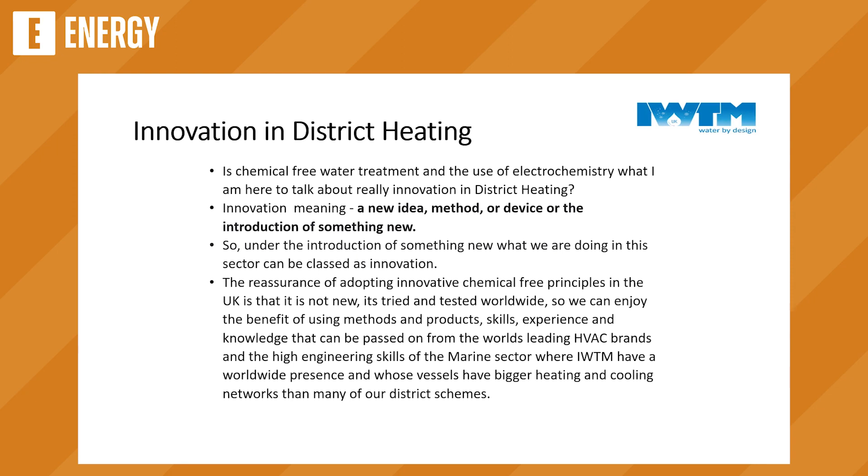We've only been in the UK for 3 years, but we can lean on the experience of all our European partners from the Nordic sector, Scandinavia, the marine sector, and the world's leading HVAC brands who have our technology within their warranty documents because they don't want chemicals within their products. That's the recognition of what we do.

We talk a lot in the UK about following the Danish guides for our district heating systems, and over the last few years we've adopted their principles for low temperatures, wide deltas, pump control, metering and efficiencies. But the one thing we've skipped over is what they say about avoiding the use of chemicals. The Danish network guide says we should avoid chemicals, because if you have a district heating system which leaks into the ground, you're putting chemicals straight into the water table.

The Nordic Innovation Centre report in 2004 - that long ago we had 500 systems in operation using our products in Norway in district heating networks.

VDI 2035 is a German standard, and that is all about chemical-free water treatment, and you'll see that mentioned in a lot of the big brands' manufacturers' warranty requirements. So world-leading brands have got it in there - you should follow VDI for your warranty purposes. And in the Swiss and Austrian norms, it's all about chemical-free.

We've had the efficiency of our products tested by the most respected Dr. Philip Mung from Midland Corrosion, because the obstacles we were getting when we first started in the UK were people saying, well, it's okay on European water, but our water's different. So just to prove the doubters wrong, we had it tested in UK laboratories.

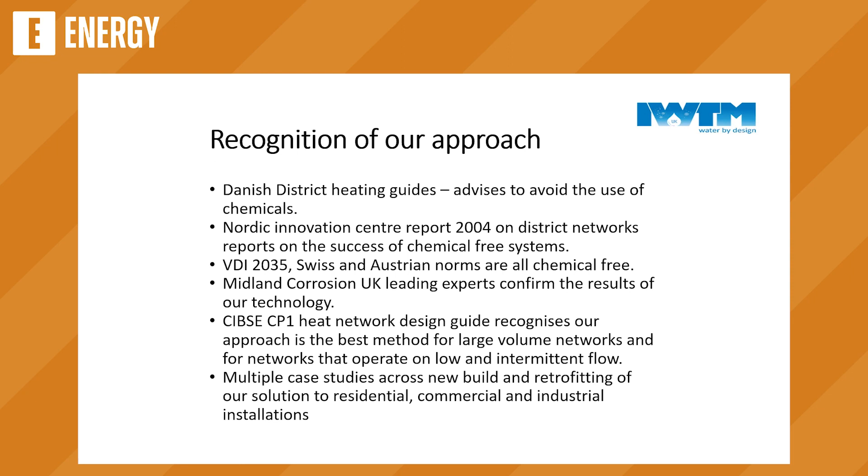We've got multiple case studies in new build and retrofit environments, but more and more now it's clients doing environmentally friendly projects who want to start avoiding chemicals. So the major networks we've been involved in include Bunhill - the world's first project to take heat off the London Underground and heat up homes in Islington, schools and a leisure centre. It's a renewable energy project, with a heat pump sitting on top of a disused underground station, taking heat from 30-35 degrees up to 70 for district heating. It made no sense to have a renewable project but then fill it full of chemicals.

Barking Riverside is a scheme in London which is going to be 16,000 homes. It started its life as a chemical system, but for complications of phasing they've now moved to chemical-free, which makes the phasing a lot easier when you're not using chemicals. There's also Stoke City Network and Swaffham Prior, a project we're really pleased about which I'll talk about more, and the Viking Network - hundreds of smaller district networks we're on.

Then there are developers who are concerned about the environment and are moving to heat pump technology. It makes no sense on one hand to say I'm putting in an environmentally friendly system using heat pumps, but then fill it full of harmful chemicals. So if you've got renewable technology, look at other things too to reduce carbon emissions.

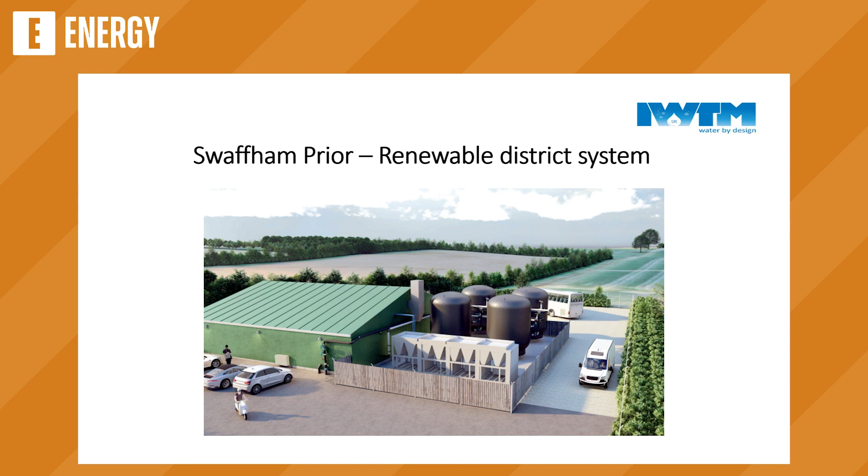Swaffham Prior was the UK's first project to be 100% renewable energy. It uses ground source heat pumps, air source heat pumps, and a solar PV field to generate electricity for the energy centre. It's our largest district network to date - 450,000 litres of water, all done without using 1 litre of chemicals. If that was a chemical system, it would have needed 9,000 litres of chemicals to treat it for commissioning, cleaning and biocides, which equates to 450 20-litre drums, to give you an idea of how much that would be.

And of that, 50% would have gone down the drain because you'd have used it for your cleaning, your process, dumped it, and then refilled again. So we have done it without using 1 litre of chemicals.

The client and the pre-commissioning contractor were new to our technology, so a bit sceptical about whether it would work. But working together with them, we came up with a pre-commissioning plan to make sure they got through the process painlessly.

So the energy centre was cleaned by filtration, and the district network by ice pigging. I don't know if anyone knows about ice pigging, but it's a bit like a slush puppy, which is pushed through the pipe. As it pushes through, it cleans the debris, and the ice just pushes the debris out to the other end of the network.

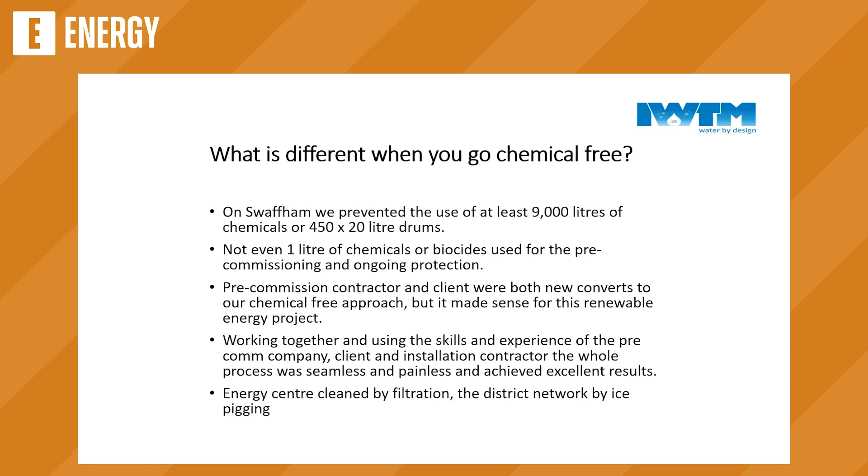So the process of using chemical-free for a pre-commissioned contractor is no different to what they do with chemicals, apart from the fact they don't use chemicals. Their cleaning medium is bacteria-free, demineralized water instead of chemicals and biocides. That's finished off using our devices using electrochemistry, which absorbs and uses the oxygen, and controls the pH and conductivity.

So the process was filled with bacteria-free demineralized water. A side stream filtration unit was used to get system debris out of the pipework, and the system was filtered, but without putting anything to drain, just capturing the debris in filters. Then the energy centre was circulated through the primary and secondary pipework.

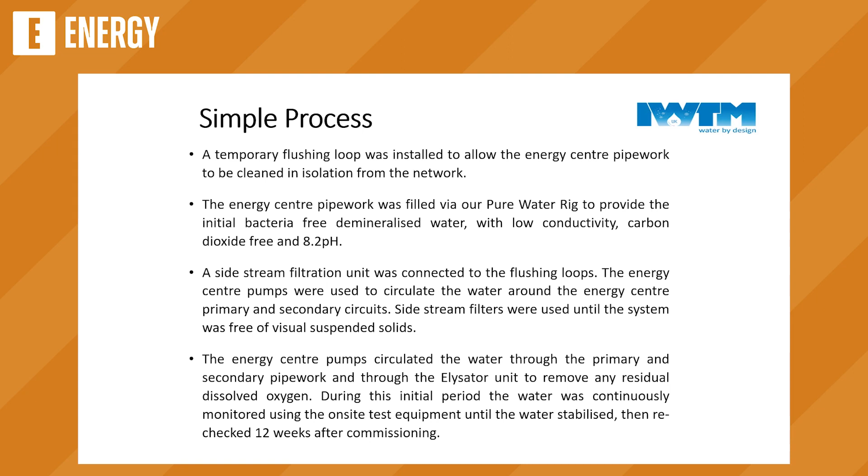Everything was tested, and VDI says that 10 to 12 weeks after commissioning you should check to make sure everything's stable, which is different to the UK, which is like a 7-day test. But it's 10 to 12 weeks, making sure everything's okay. So the water was sampled at appropriate intervals.

Working with Suez, the underground pipe was ice pigged. The ice pig was pushed out using demineralized water - they inject the ice into the pipe and push it out with demineralized water. But their demin water wasn't quite at the levels we wanted it to be, and that fresh water is going to be full of oxygen, which is the biggest cause of corrosion, so we want to get that out.

So the solution was to connect some of our mobile units, which I'll show you in a minute, to the underground network. Once it's been ice pigged and filled with demin water, which is lower pH than we want but full of oxygen, we connect our magnesium anode technology to that. That consumes the oxygen, and in doing so pushes up the pH to get exactly where we want it to be - only a one-time fill.

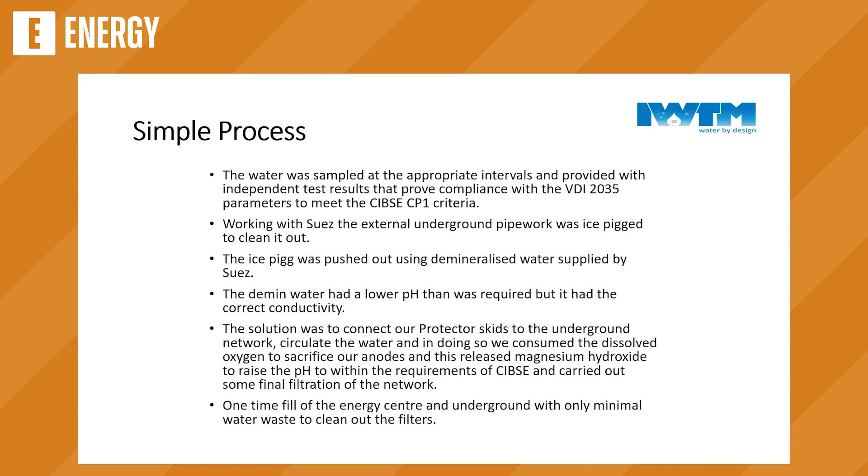So as well as avoiding the use of chemicals, we've only used 450,000 litres of water. Normally you'd be using at least double the amount of water if you're doing a chemical flush and clean. So we're not only avoiding chemicals, we're also saving on water.

This is our mobile unit, used to connect to the ice pigging. After the ice pigging, we connect our units to the system. These are full of magnesium anode rods. The magnesium anode consumes the oxygen and releases magnesium hydroxide to push the pH up and control the conductivity, because we want to control the three things with chemical-free: pH, oxygen, and conductivity, all done by electrochemistry.

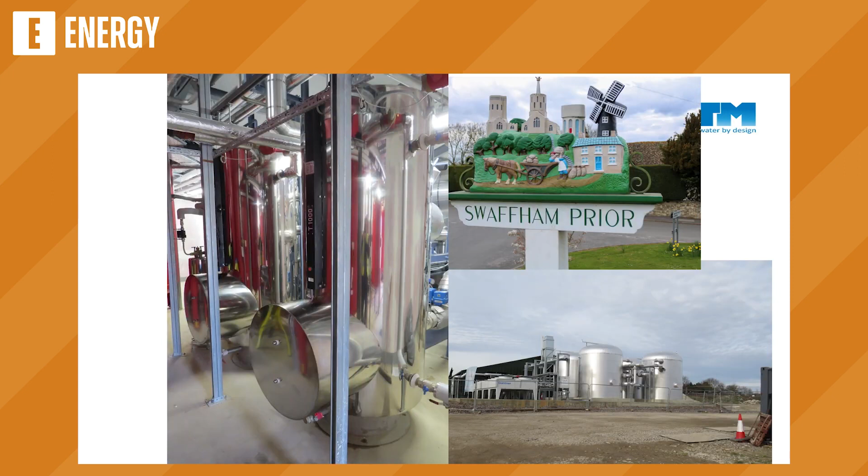That's the finished energy centre. Swaffham Prior, if you look it up, you'll see all about it - it's a very exciting project. That's our two large electrochemistry units, maintaining that water going forward. We filled it with the bacteria-free demin water, and now going forward it's being maintained with our devices, and this is done by our chemistry graduate.

Most of our clients have that oh my God moment, it really works. So the skeptics, once they've used it and see the results - using the oxygen from the system to produce the magnesium hydroxide for the system is all we need to do. It's very simple, school level chemistry. I'm not a chemist, I'm a gas engineer by trade. It's a simple solution for everybody to adopt, and this is why we're being taken up with very big district heating networks in the UK.

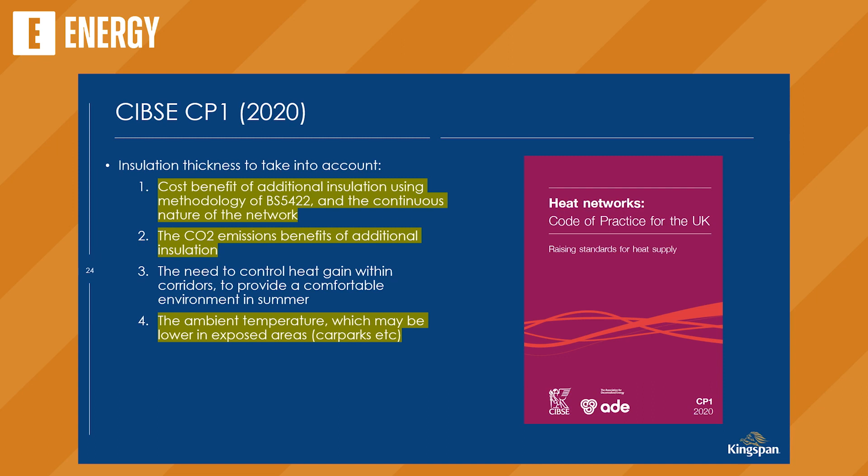So to start with, we'll touch briefly on CP1. I'm sure everyone here is familiar with it. If you're involved in secondary heat networks, you've probably looked at it, gone to the sections that are most relevant, looked at the outputs you need to produce evidence for. But it's worth noting that within the document, it highlights that when looking at insulation, you shouldn't just look at pure heat loss. You should look at the cost benefits of additional insulation and the impact on CO2 emissions, using your project conditions which generate it. You shouldn't use standard assumed conditions from, say, BS 5422 or CIBSE Guide C. You should use your actual project conditions to calculate all your losses.

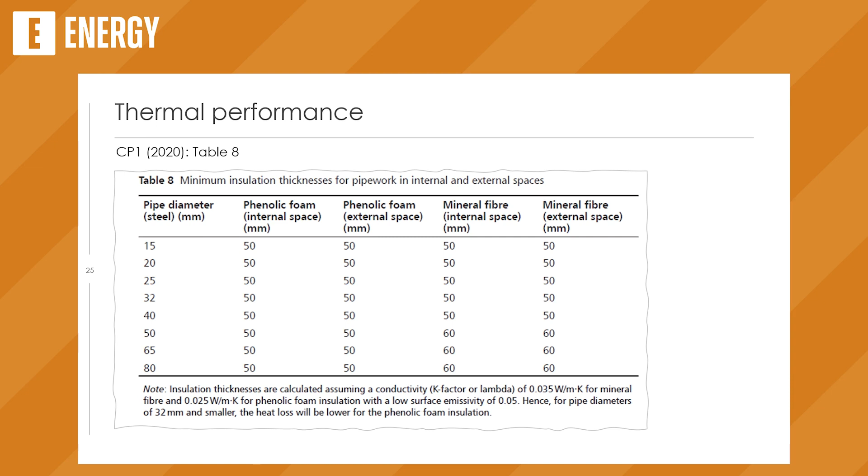So to start with what CP1 says about thermal insulation, you've probably seen this table before, which is a great improvement on the previous edition of CP1. We've got both phenolic foam and mineral wool considered within this table. As Kingspan, we manufacture Kooltherm, which is a phenolic insulation. So here it's got both phenolic and mineral wool, both at 50mm thickness and 60mm on the greater sizes. Obviously, those two different materials have a performance difference.

So when you're doing CP1 calculations, in some ways this becomes a distraction, because what you actually have to do is the 3.9.8 calculation. You need to take the annual heat loss from the plate heat exchanger to the HIU and divide that by the number of dwellings. This is really the key part for thermal insulation within CP1 for the secondary network. The calculator that we've only just launched looks specifically at this, the annual heat loss from your heating system, and really helps with the CP1 side while also considering that carbon element and the cost element.

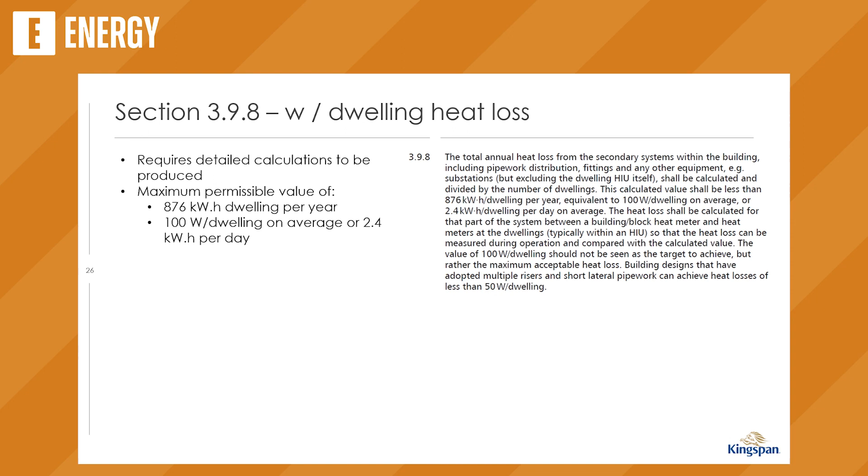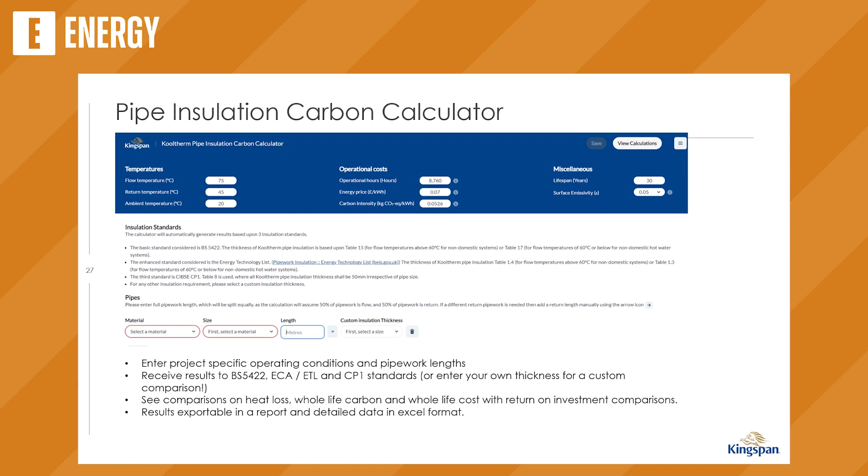So what's it going to show you? First of all, it's going to give you a comparison graph on embodied carbon and operational carbon. The embodied carbon is taken from our EPD, and within the calculator there's an embodied carbon per meter of insulation, so you can get the embodied carbon of the build-up you've selected. But it's also taking that carbon intensity figure for the heating system, and via the heat loss, turning that into your operational carbon from the heat lost over the lifespan.

You can use sliders to modify this up or down, which will change all the graphs as you go. This lets you put into perspective the carbon benefit of going to a higher insulation standard. In this example, on the custom thickness I put 75mm just as an example. The embodied carbon increases since you have more insulation, but the increased thickness is greatly offset by the energy and heat loss saved. So you'll save a lot more carbon by going thicker than you would by staying with a thinner solution.

Secondly, we've got the annual heat loss. This might be useful for anyone doing CP1 calculations—it will calculate the annual heat loss of the system and give you those values. If you're doing a CP1 calculation, you can just divide that by the number of dwellings, and this will tell you whether you're where you need to be, whether you need to go up in thickness, or whether you have scope to go less than the thickness you're looking at. We usually encourage sticking as close to CP1 as you can, rather than chasing after that best practice target.

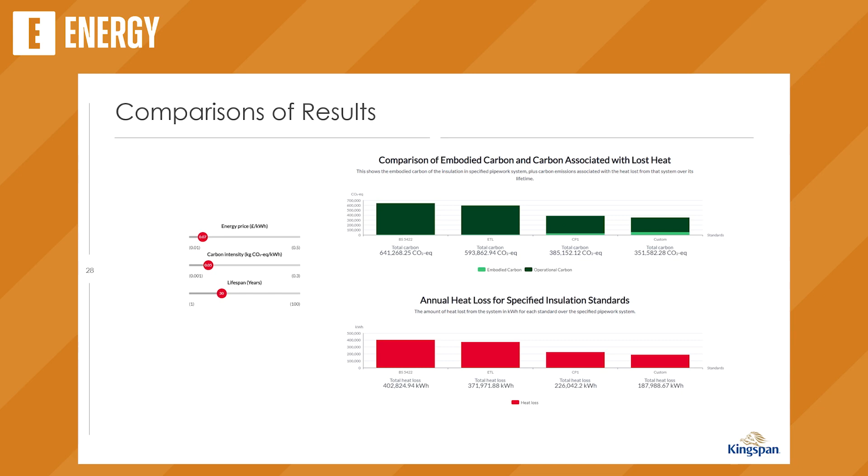The real question we got from people is, okay, what is the actual benefit of this? This usually came from contractors saying this is costing me 2-3 times the amount of a British standards system—that's what I've quoted on. What's the actual benefit? So we thought, let's quantify this. Using the energy price you've input, in this case 7 pence a kilowatt hour, by looking at the cost of the lost heat and what is the best system. The capital costs are based upon the sales price of our insulation with supply chain margin, so you can actually see the capital cost of the insulation of the system you're looking at.

So you can see here that a CP1 system is about 3 times that of the BS5422, but actually the operational cost of the system over the 30 years is around £300,000 cheaper for going to CP1. So even though on the capex front it's more expensive, over the whole life of the project it's actually significantly cheaper.

So there is a benefit even when you're not working on a district heating project to going to CP1 standards. By looking at this at an early design stage and presenting this to the client, people can make an informed choice on what they want. They can say, okay, these are the implications. Yes, I know I'm paying more, but these are my benefits, which helps with that conversation further down the line.

Further to that, we also have a number of return on investment graphs. So it will show you how long that additional insulation will take to pay back versus the British standards. In this example, based on a project in London, it was 5.7 years over a 30-year lifespan.

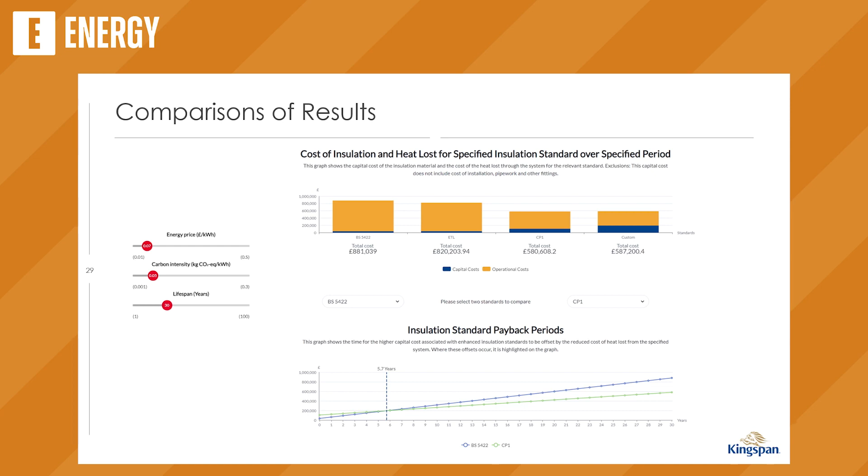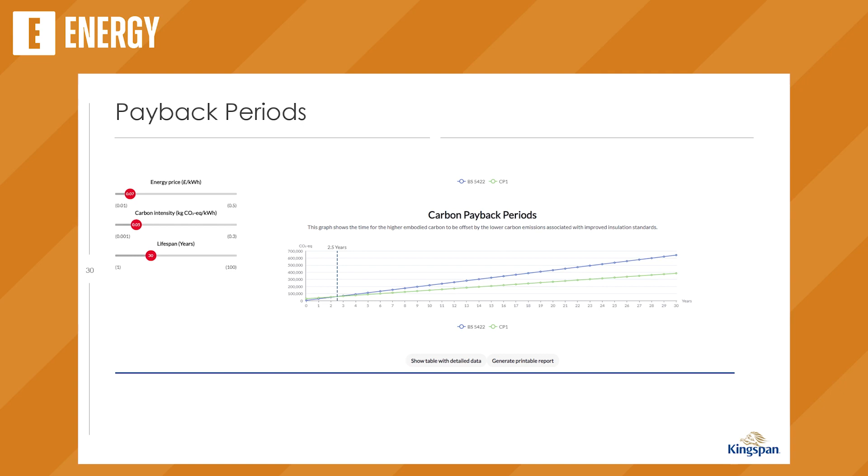So there is a cost question of, should you go that high on everything? Are there certain areas you can get a benefit from doing so? It really helps to put this into perspective, no matter where you're sat in the supply chain or the contract chain, whether you're doing sustainability, initial design, detailed design, or contractor work - it puts it all into perspective.

So what this also then gives you is the detailed data. This will tell you the exact flow and return heat losses on the system you specified, as well as all the other information about capital costs, everything that goes into making those tables. This will give you results for each of the 3 standards or your custom installation.

And finally, we can then wrap it up into a report which you can then generate and put in your project pack. So essentially it's there to make the lives of designers and everybody easier, help you pitch where you actually need to design, what thickness you're going to need at an early stage.

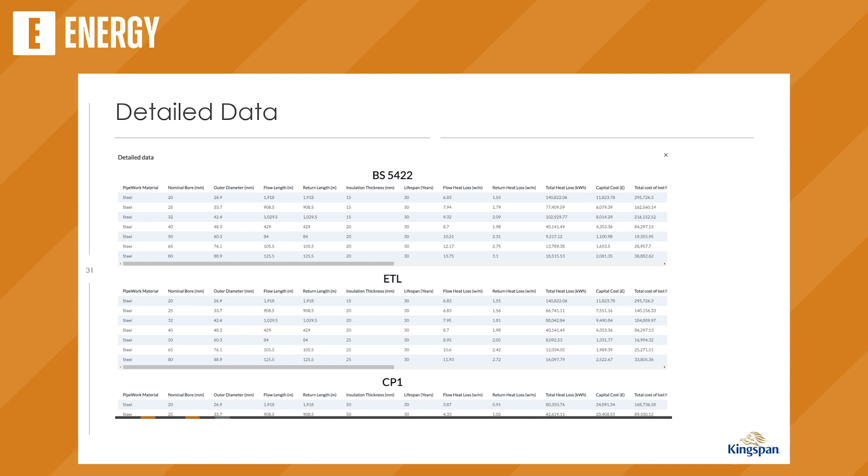Brilliant. So thanks very much indeed to Mark. A really interesting and timely piece of software. Many people are not aware that the latest GLA Energy Assessment Guidance actually requires you to do a CP1 calculation within your energy strategy, and many will fail. If you go on to RIBA, Royal Institute of British Architects, I actually wrote an article recently talking about this fundamental issue of secondary network heat losses.

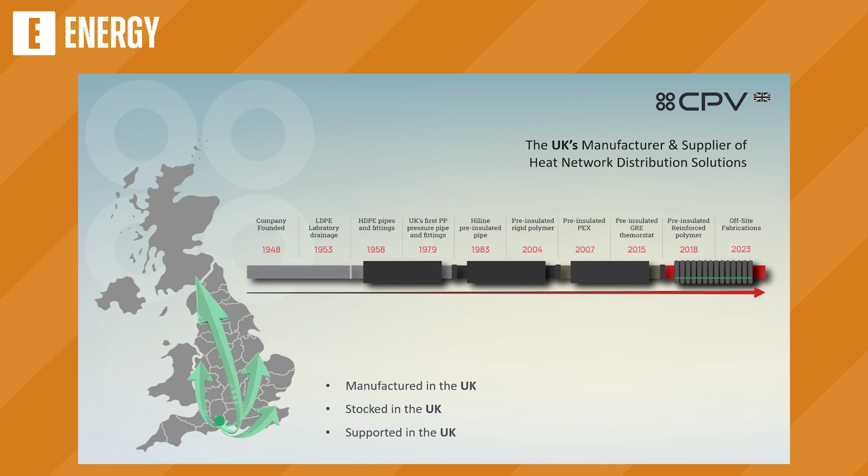So a little bit of history. CPV is a UK manufacturer, supplier of heat network distribution systems and the pre-insulated pipes. In fact, we've got over 70 years experience in polymer technologies. Going back to the 1950s, we were very much in developing polymer technologies for chemical process, chemical drainage applications. And then in the 1980s, we moved into pre-insulated pipe work, predominantly carbon, steel and copper in those days. And then beyond that, we introduced a number of innovative polymer technologies serving heat network systems.

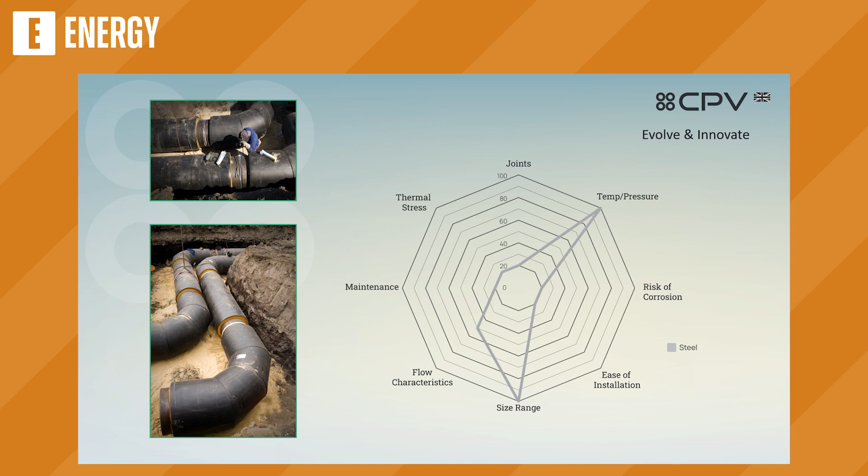So, for example, if we look at some of the basics, we know that certainly carbon steel has a significant strength in terms of its capability to handle higher temperature in networks. And so over the years, we've developed a number of polymer and composite polymer solutions that are able to close that gap and complement the steel also.

And then, of course, there's weaknesses in carbon steel. It corrodes, it rusts, which is unlike polymer solutions that can remain corrosion-free and clean throughout the life of the system, ensuring that the network efficiencies are not compromised and obviously minimising risk of failure.

Many other factors that we can consider when we look at this, but all of these have led over the last sort of 20 years in CPV to the evolution of a number of alternative solutions that will either replace or complement carbon steel.

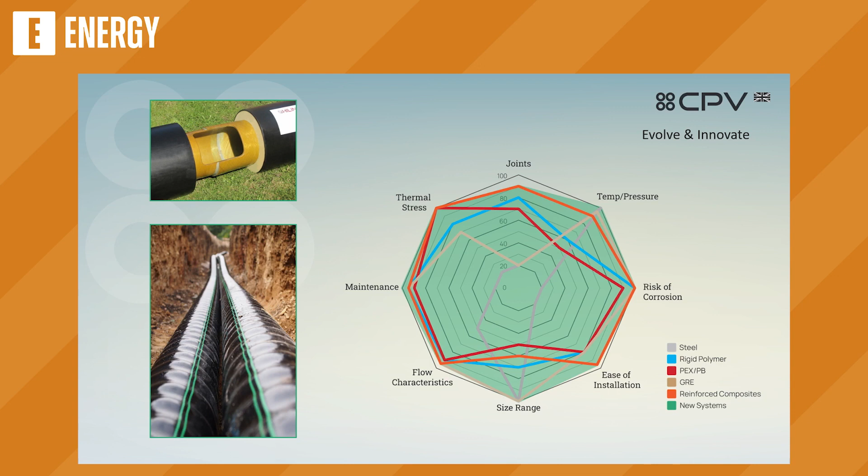So CPV now has arguably the most comprehensive portfolio of pre-insulated pipework solutions. We started initially, as I said, in the 1980s. We were pre-insulating carbon steel pipes, copper pipes. That evolved. We introduced polymer technologies for heating and cooling networks.

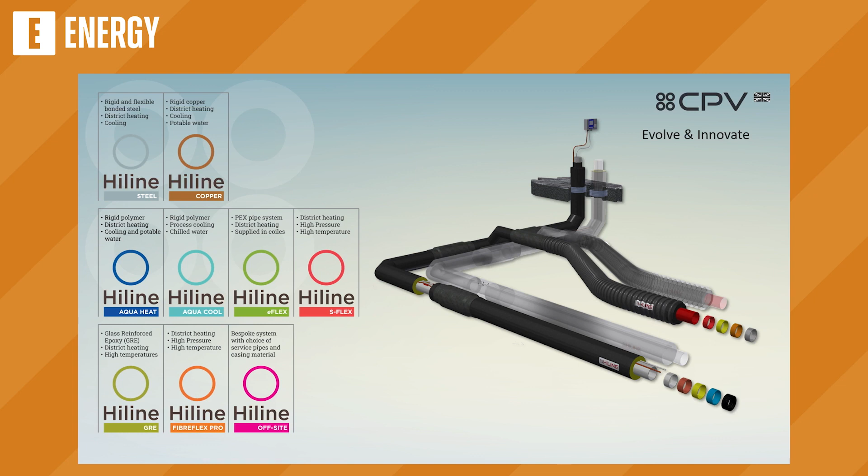We added to that with flexible polymer solutions, and then also again with flexible metallic and stainless steel solutions for that. Before moving through to things like thermoset materials and composite polymer solutions that really would close that gap on meeting the higher temperatures that were demanded by heat networks at the time, and then introducing off-site fabrication services to support heat networks.

So really now, what is the next stage of evolution, or more specifically, what does it mean for heat distribution networks? And how do we move forward this drive towards decarbonisation?

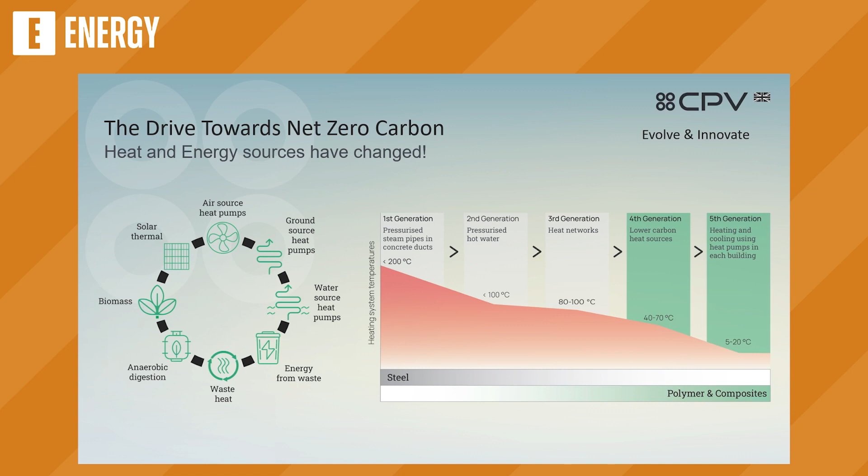So with networks changing, or more importantly, heat energy sources changing, that has an impact on the networks themselves, and they need to change. And I think fundamentally what it means is we're seeing a significant reduction in temperatures. Clearly, as we have third generation, now transitioning to fourth generation, and as we move towards fifth generation and ambient loop, these temperature networks are lowering significantly.

So this means through this process of evolution and innovation of our systems, and how we support it, we need to reset the parameters in terms of when we focus on development of our systems. But I think importantly as well, we also need to look at what are our headline objectives.

And this is really to be able to offer a solution that's more sustainable. It's obviously of the highest environmental credentials, it's high performance, but importantly as well, we need to look at solutions that will reduce network costs from an installation point of view, and also from an operational cost.

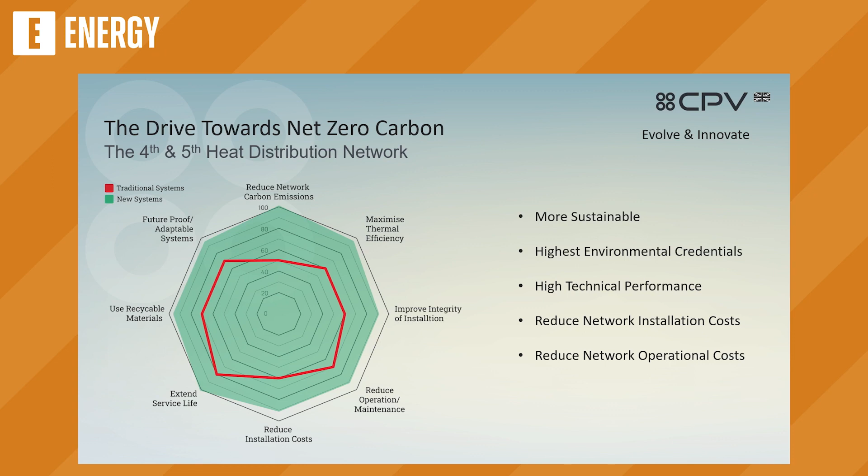So CPV's next stage of evolution is our Hiline Clover system. This is a system that offers a full network solution with a range of products from DN20 to DN600mm sizes. It's designed to have an operational service life of up to 50 years and capable of operating continuously at 80 degrees C. So indeed it's well placed to deal with certainly fourth generation networks and beyond.

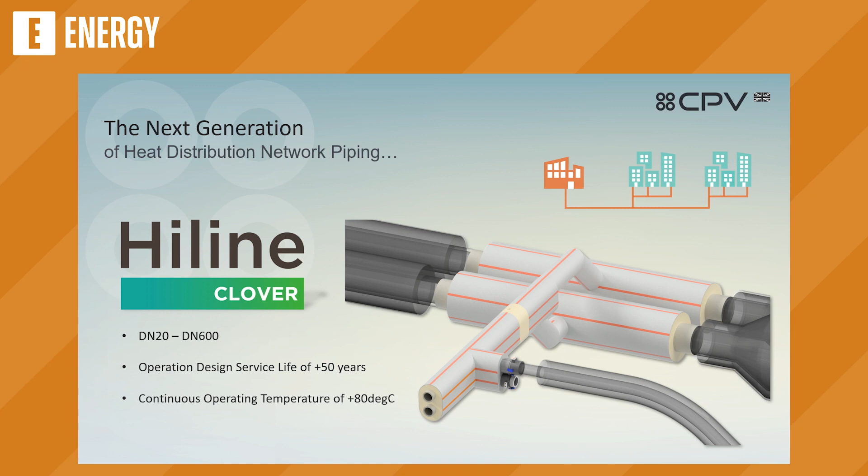Clearly you can see it looks identifiably and distinctly very different to the industry norms. It's grey in colour and it has permanent identification stripes, so it looks very different.

It comprises of a high performance polymer service pipe that's capable of meeting performance and service life criteria as demanded by networks and relevant international standards. It's polyurethane foam fill insulation, and it also has an external casing, the grey casing, which is a higher strength polymer casing than you would normally see as an industry norm. So it's well placed to resist the rigours of a long service life below ground.

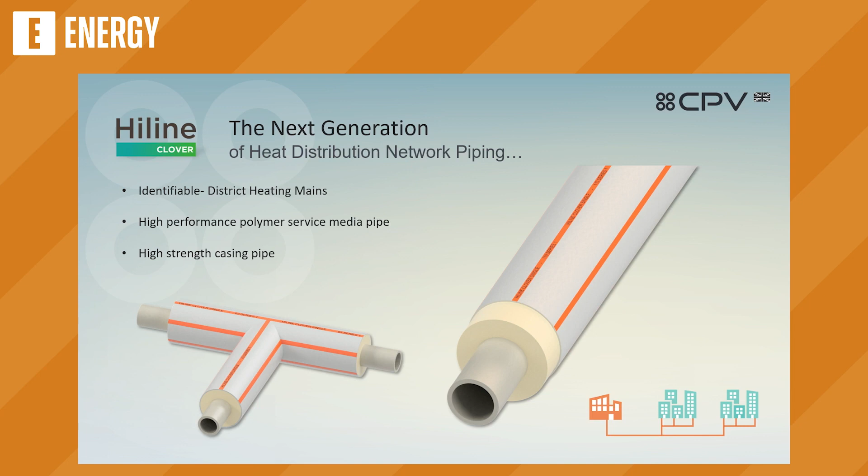Particularly interesting and unique is our twin pipe system, the Hiline Clover Duo pipe, which utilises an oval, or more correctly, a stadium shaped casing pipe. This shape allows for optimisation of thermal insulation whilst offering material savings, including savings in transportation. We're offering the Duo system from DN20 to DN100 sizes currently.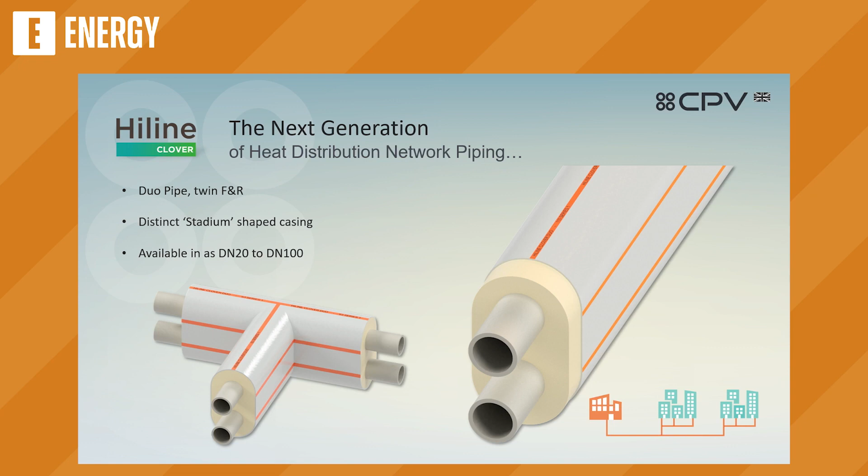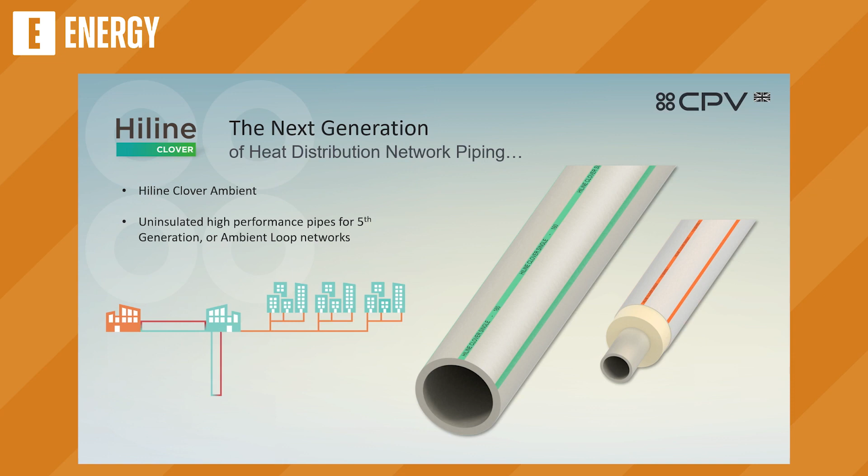Also within the range we offer Clover Ambient, an uninsulated pipe, which is well placed for fifth generation and ambient loop networks.

Hiline Clover pipes are all jointed with proven fusion welding technology. We supply all the pipes and fitting assemblies, as you would normally expect from a pre-insulated carbon steel configuration with spigot ended pipes, and they can all be jointed with conventional and proven butt welding and electrofusion technology.

Alternatively, we have our click weld system as illustrated in the video, a unique system where the factory fitted ends are locked and welded on site using a simple electrofusion process. This reduces a lot of on-site joints, time and risks. It's built around the need to address the skill shortage that currently challenges the district heating market, making this a much quicker, easier and risk-free system to install.

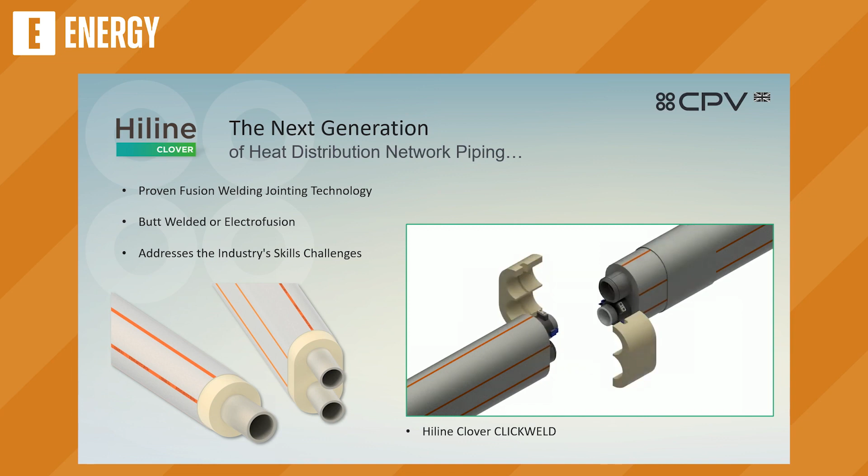So we will look at the environmental credentials of Hiline Clover. Perhaps one of the most significant, when we make the comparison against carbon steel, is the combined CO2 emissions in terms of the raw material itself and the polymer pipe production. It's well documented that they can be at least half, and probably nearer to a third, of that of a carbon steel pipe.

This situation is of course further improved when you consider that most carbon steel pipes have been brought into the UK from mainland Europe. All of CPV's Hiline Clover pipes are manufactured here in the UK, which has a significant impact on their environmental credentials, and any waste material generated in the production process is 100% reprocessed and repurposed in-house for our production.

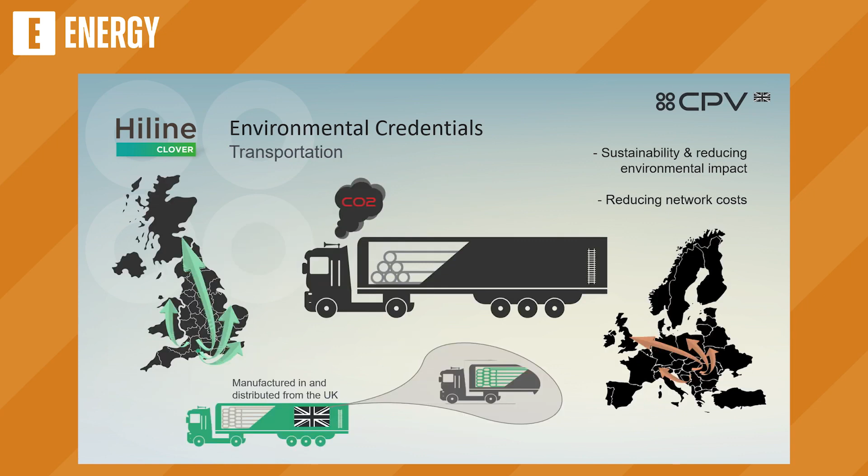Looking at transportation resulting CO2, whilst greatly variable, it's significant. Carbon steel pipes can weigh up to six times more than a polymer pipe, and as mentioned, most of that is coming in from mainland Europe. So we can fairly easily demonstrate potential carbon savings from manufacturing in the UK of perhaps tenfold with Hiline Clover pipe over a carbon steel pipe.

And then when we look at the Clover Duo with that stadium casing configuration, we're clearly shipping far less fresh air around the country on trailers.

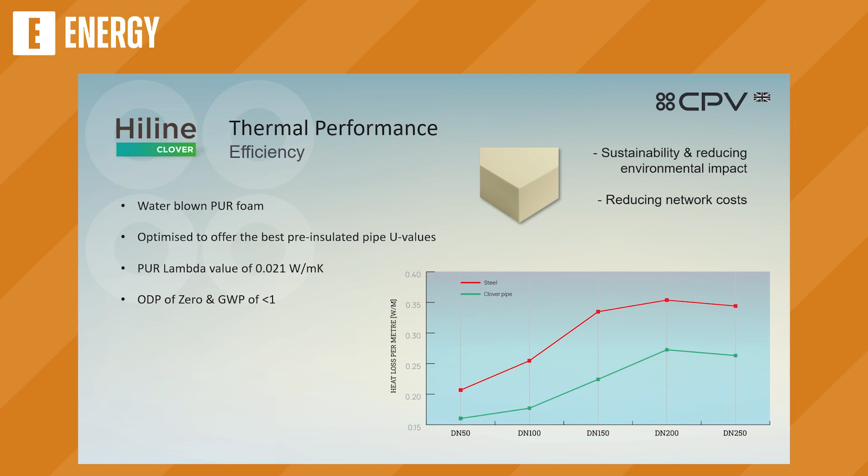If we look at overall thermal efficiency, we use a water-blown PUR foam, an environmentally friendly foam. We achieve a lambda value of 0.021, and generally we have a default thickness that would align with what we know as Series 2 with EN253. But we can offer alternative series of insulation as and when required.

When we compare that to a typical carbon steel pipe, we see significant savings in cost and reduction in heat loss. And again, the Clover pipe with its stadium casing has the ability to reduce material content and cost without compromising thermal efficiency.

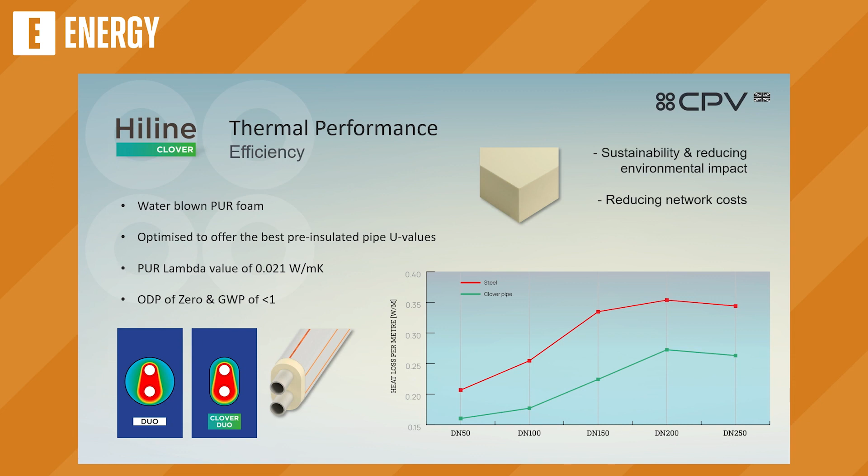Hiline Clover pipes, and polymer pipes in general, offer a number of benefits over carbon steel pipes, but notably, and well understood, is that unlike steel they won't corrode or rust, and therefore aren't at risk of premature failure due to corrosion. We also don't see a reduction in flow characteristics over the life of the system. This means there are opportunities to save on overall operating cost, reduce network maintenance, and reduce the risk of premature failures.

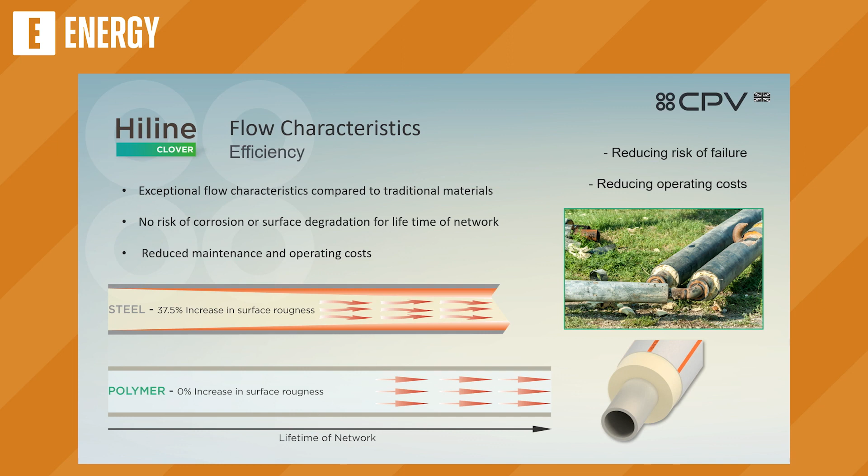If we put some of these into an example and look at how the costs and environmental savings stack up: take a relatively small scheme, say 1,000 metres of flow and return in a DN200 with branches off at DN80, about 400 metres worth, and compare a traditional pre-insulated carbon steel network against Hiline Clover. Rolling all the material costs, transportation costs, civils and pipe install together, we can see savings on the Clover pipe of around 7 to 8%. If we add the Duo pipe, the Clover Duo, into that equation, we can get the savings up to somewhere near 16%.

When we look at the reduction in heat loss and the cost associated with that, that's significant as well. We can see a saving of around 30%, and far more again when we start to look at the Duo pipe configuration.

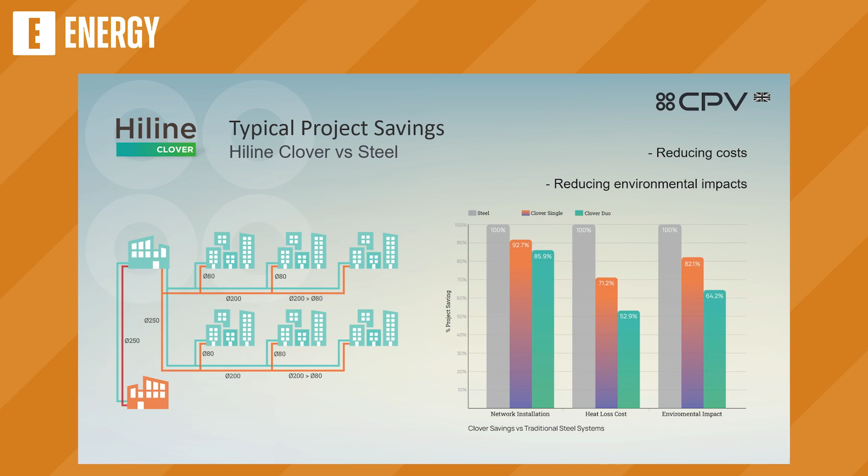On the basis of this exercise, we've simply considered transporting pipes around the UK. If we bring the factory aspect in, having to bring steel pipes in from continental Europe, those numbers really are very conservative indeed. And of course there's the CO2, the environmental impact - that flows through too, with equally interesting numbers in terms of potential savings.

The Hiline Clover system, as with all of the other Hiline pre-insulated pipe solutions we offer, includes an off-site fabrication service that's growing significantly at the moment. We offer full design support, BIM Revit capability, training at CPV and on-site to support contractors. We also offer the full surveillance system with detect and locate capability on all of the systems as well.

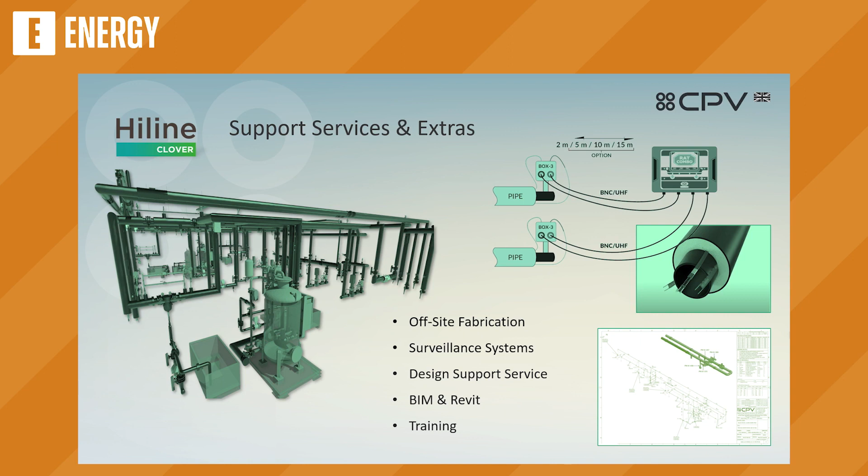Additionally, supporting that range as a last item, we're now introducing as part of all of our Hiline ranges the option of Carbo Seal, which is in fact the industry's first dedicated relining solution for networks. This supports all of the CPV's Hiline pre-insulated piping systems.